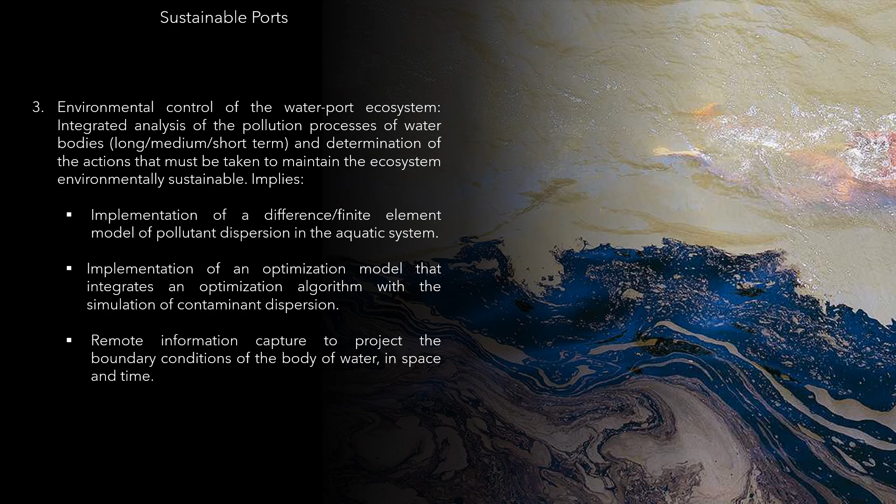Third, environmental control of the water port ecosystem: integrated analysis of the pollution processes of water bodies and determination of the actions that must be taken to maintain the ecosystem environmentally sustainable. It implies implementation of a finite elements pollutant dispersion model in the aquatic system, implementation of an optimization model that integrates an optimization algorithm with the simulation of contaminant dispersion, remote information capture to project the boundary conditions of the body of water in space and time, and weather planning of the trip on the boat.

Three aspects must be taken into account in fuel consumption, and therefore in the emissions generated: tidal height, wave height, marine currents, and motor speed, which depends on the type of motor. Additionally, the characteristics of the boat must be considered, including the dead weight and the additional load. The wind speed and the water speed are determinant of the ship's speed and therefore fuel consumption. In practice, it is one more variable to control, which is directly affected by hydroclimatic conditions in the sea.

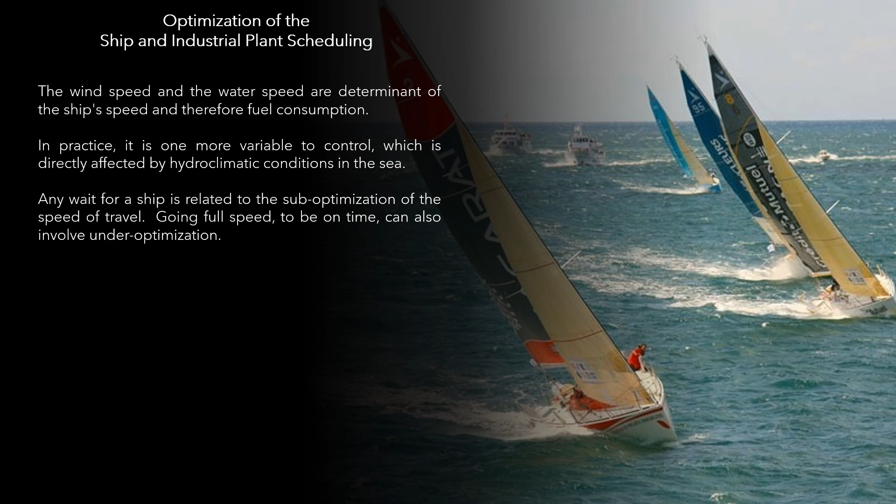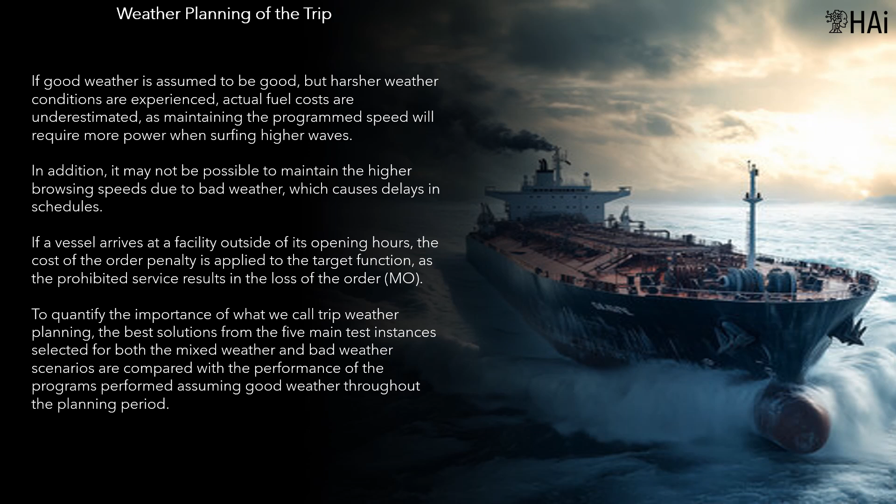Any wait for a ship is related to the sub-optimization of the speed of travel. Going full speed to be on time can also involve under-optimization. To quantify the importance of what we call trip weather planning, the best solutions from the selected test instances for both mixed weather and bad weather scenarios are compared with the performance of the programs performed assuming good weather throughout the planning period. The article: A Time-Dependent Vessel Routing Problem with Speed Optimization.

Introduce the mathematical model: Time-Dependent Vessel Routing Problem with Speed Optimization, TDVRP-SO, used in Norway for route and speed planning of ships visiting North Sea platforms.

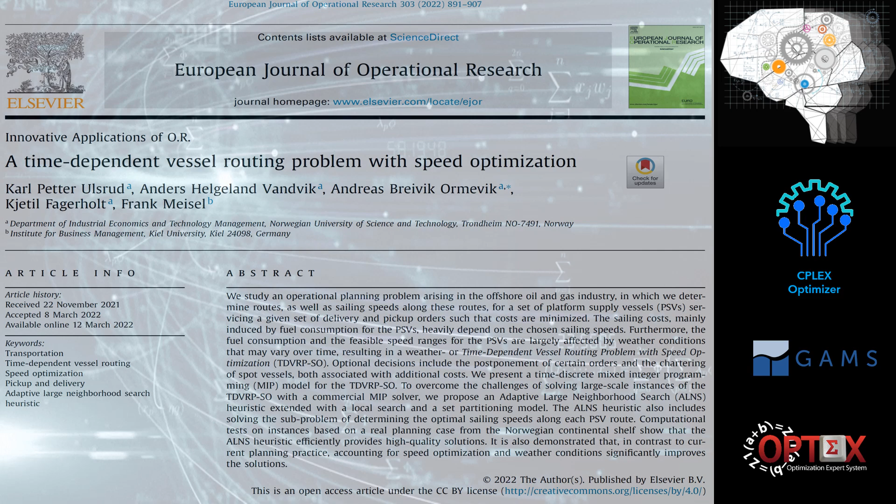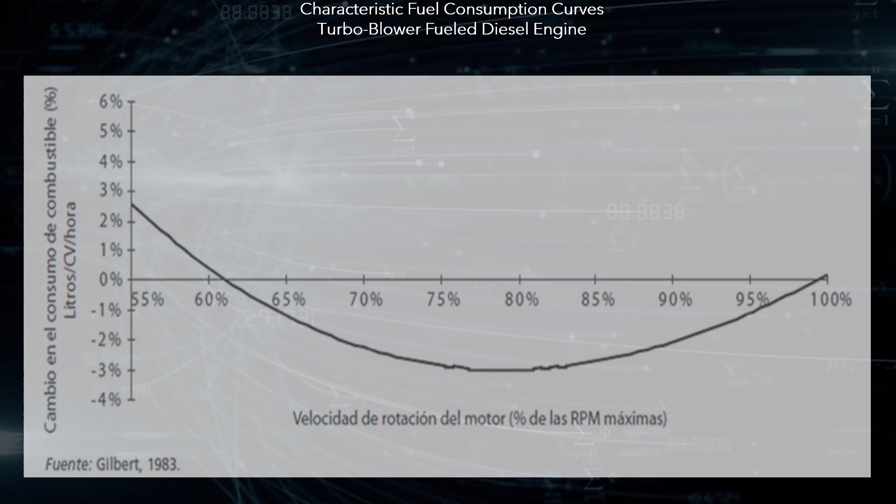It should be borne in mind that, from the point of view of fuel consumption, the efficiency of an engine is not given at the maximum of its power. The minimum unit cost per RPM is close to its maximum capacity, in the graph 80%. From that point on, as the ship's speed decreases, the amount of fuel consumed per unit of displacement increases. If RPMs increase above optimal capacity, the unit cost increases exponentially. On the other hand, these curves change depending on the weight of the boat and specific sea conditions. This behavior is independent of the size of the ship.

The graph presents the fuel consumption curves as a function of the ship's speed. There are 5 curves, for different revolutions per minute, which are related to different blade pitches. The exponential nonlinearity is evident.

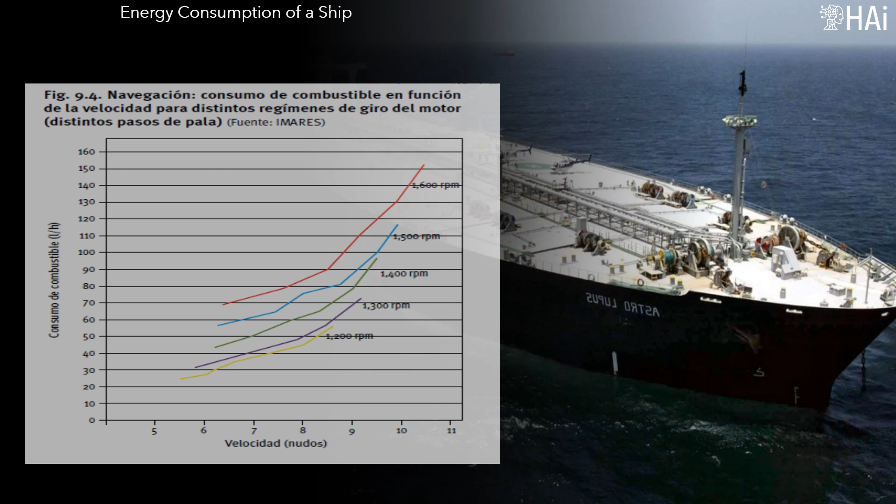The problem of supplying vessels to a rig is faced with operational planning arising in the offshore oil and gas industry, in which the routes and sailing speeds along those routes are determined for a set of platform supply vessels, PSVs, serving a set of delivery and/or pickup orders, so that costs are minimized. Navigation costs, mainly induced by the fuel consumption of PSVs, depend largely on the chosen sailing speeds. In addition, the fuel consumption and feasible speed ranges for PSVs are greatly affected by weather conditions that can vary over time, resulting in a weather-dependent vessel routing issue with route-dependent speed optimization.

This problem is called the Speed-Optimized Time-Dependent Ship Routing Problem, TDVRP-SO. The decisions include the deferral of certain orders and the chartering of spot vessels, both associated with additional costs, corresponding to a mixed integer programming model, MIP, with the heuristic adaptive large neighborhood search, ALNS.

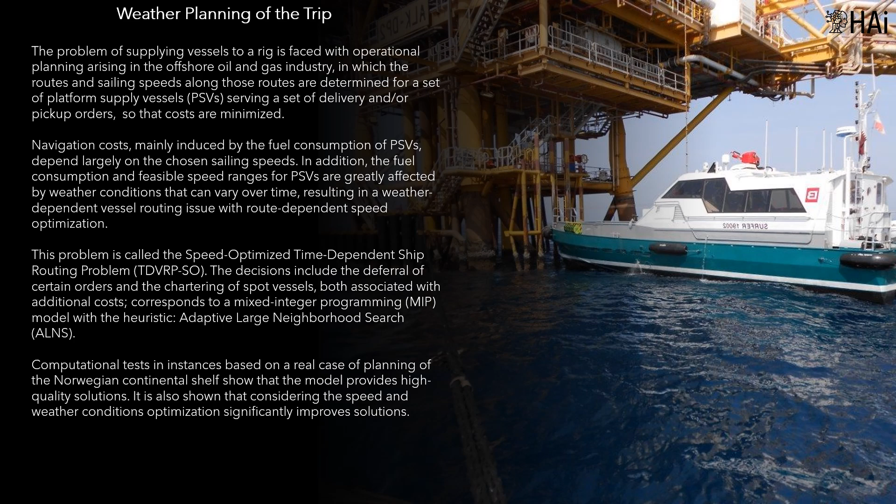Computational tests on instances based on a real case of planning on the Norwegian continental shelf show that the model provides high-quality solutions. It is also shown that considering speed and weather conditions optimization significantly improves solutions.

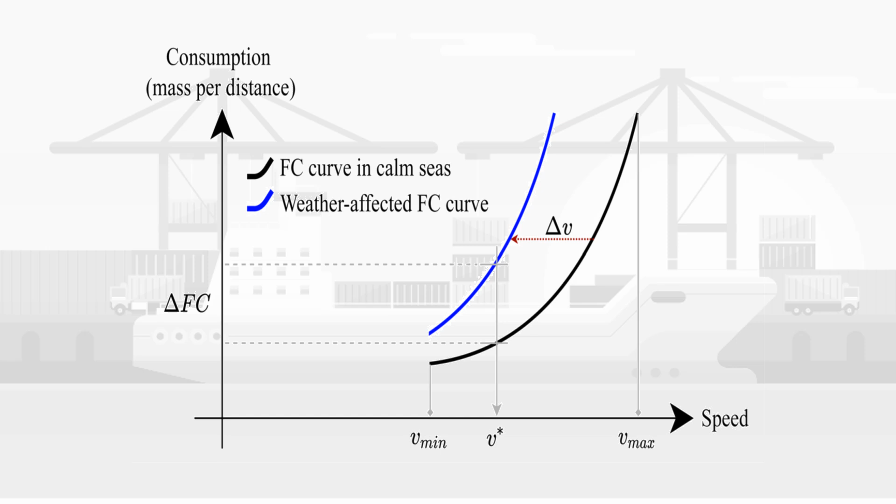The image shows fuel consumption, FC, as a function of speed. In this case, a fixed speed change delta V induced by weather conditions is assumed for all sailing speeds, shifting the fuel consumption curve horizontally so that maintaining the desired speed V* becomes a considerably higher fuel consumption, with exponential growth. V min denotes the starting point of the speed range in which fuel consumption is a convex function of cruising speed.

The TDVRP-SO determines the optimal cost-based trips, or routes, for the PSVs being used, including a full schedule indicating navigation speeds and downtime or service required on all navigation legs.

It is also decided which orders to deliver and collect, and which to postpone, along with the decision of whether to charter spot vessels on the spot market, in order to fulfill all mandatory delivery orders.

The figure summarizes the solution process for TDVRP-OS, listing the necessary input parameters and the decisions obtained, and how they can be categorized based on their characteristics.

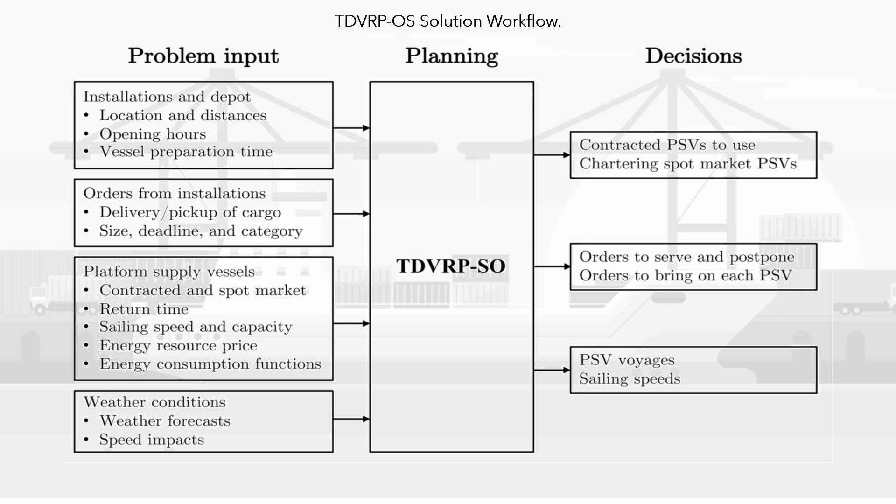Initially, an academic case is presented. The wave height forecast is illustrated in the figure, where horizontal lines indicate the maximum permissible height, 4.5 meters, beyond which orders cannot be handled in offshore facilities, for safety reasons.

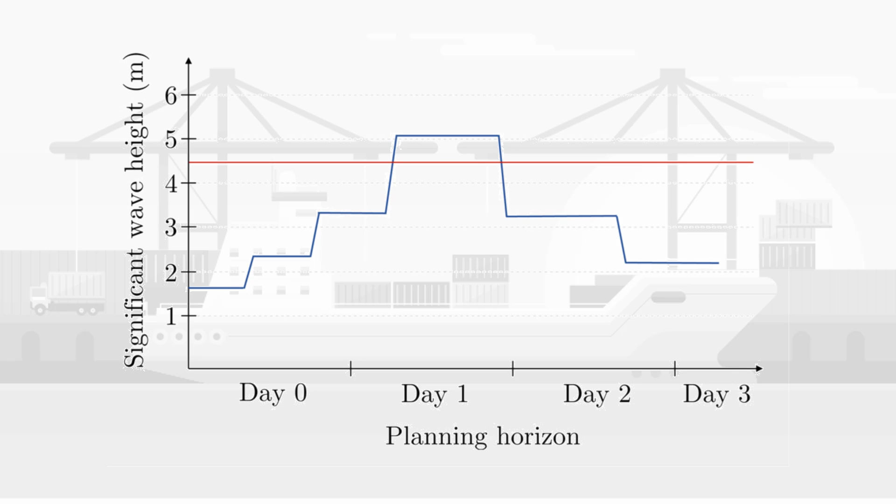The example problem considers orders placed by 5 installations. Each order is a mandatory delivery, MD, optional delivery, OD, or optional pickup, OP. Order sizes are given in containers.

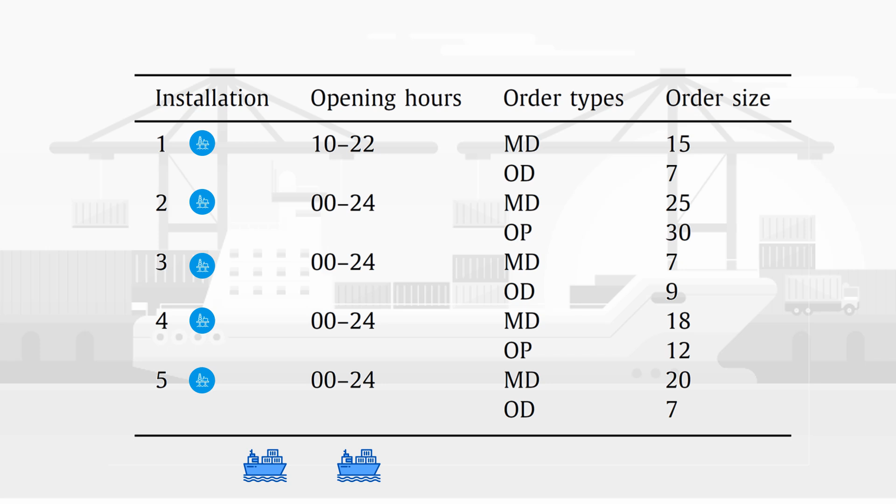2 contracted vessels, PSV-1 and PSV-2, are available, with a cargo capacity of 110 and 85 containers, respectively. For both boats, the allowable speed range is 10 knots to 14 knots, the maximum sailing speed in good weather.

The image presents a possible solution to the problem, in which all orders, both mandatory and optional, are fulfilled. The figure indicates the corresponding voyages of the 2 vessels and shows the sailing speed chosen for each leg.

PSV-1 cruises at full speed to reach Facility 1 before closing at 10 p.m. The cruising speed remains relatively high until delivery has been made to the last facility, number 4. This happens to complete all cargo handling activities before weather conditions worsen on day 1.

The day's services are prohibited. On the last stretch of navigation leading back to the supply depot, the speed is reduced to a profitable minimum, as there is no risk of violating the permitted duration of the 3-day voyage.

The northernmost journey is made by PSV-1. The green positive numbers represent the pickup quantities, and the negative, red, numbers represent the cargo deliveries.

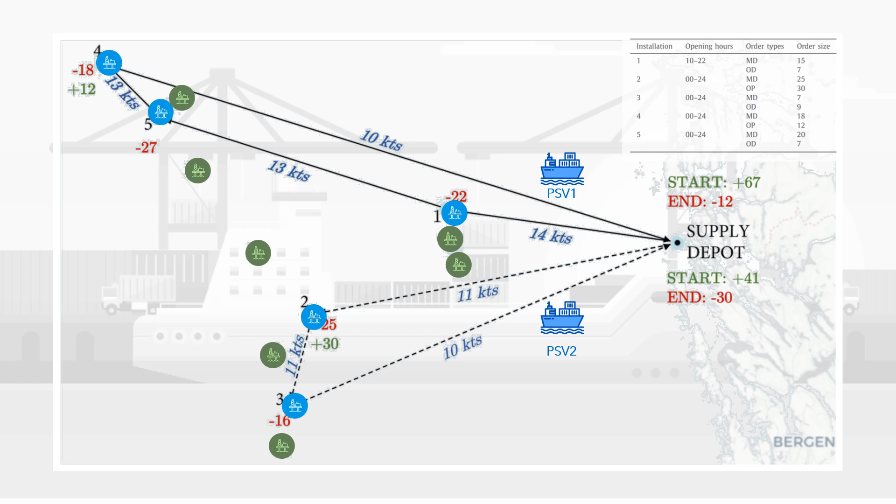Real-world experiments consider Norway's oil production in the North Sea. For realistic instance generation, the offshore logistics network related to the Mongstad supply base, located on the west coast of Norway, was considered. Mongstad is one of the largest ports related to oil and gas-related activities in Europe, in terms of freight traffic, and 27 offshore facilities are served from this base.

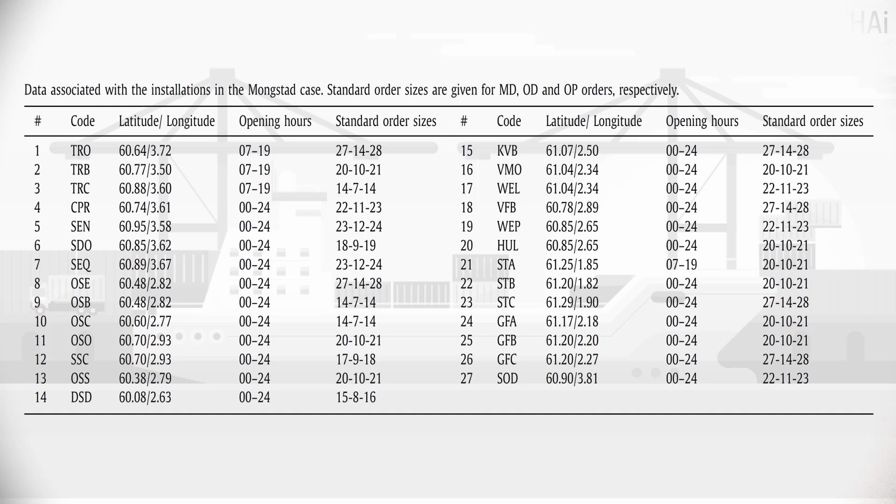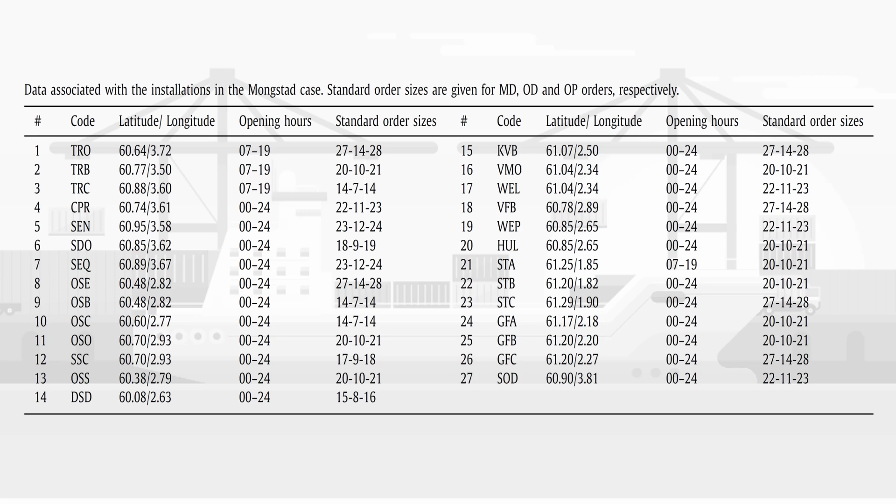For each facility, an identification code, geographic location in terms of latitude and longitude, opening hours, and a standard order size are used to generate multiple test instances. Data associated with the 27 facilities in the case of Mongstad. Longitude, latitude, hours of operation, and standard order sizes are provided for MD, OD, and OP orders, respectively.

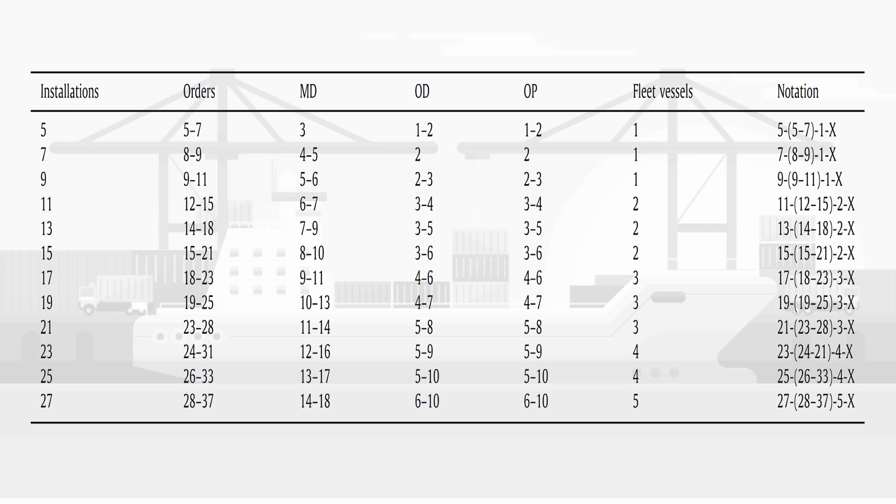Test instances used for computational study are grouped by the number of installations in each instance. There are 5 test instances within each group. The number of orders may vary, but the number of vessels in the fleet remains the same. Vessel chartering on the spot market is possible for all cases and in all groups.

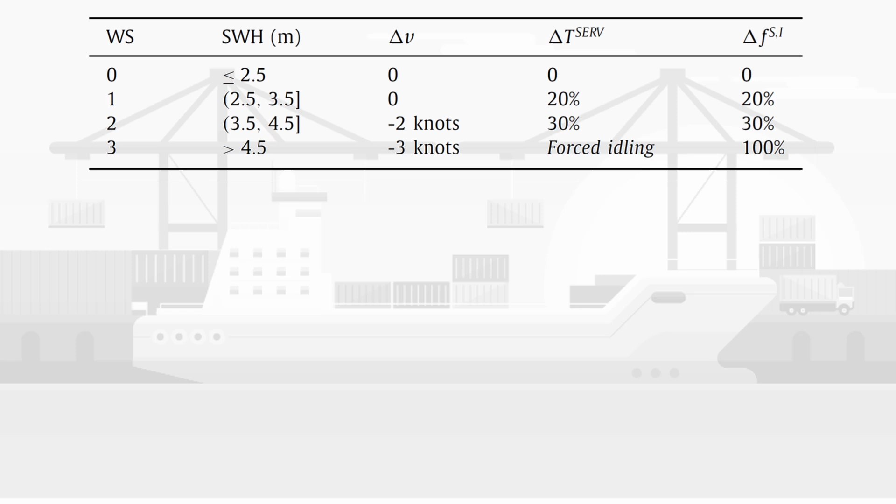4 meteorological states, WS, are considered based on significant wave heights, SWH, and the impact on PSVs in terms of forced speed reduction, delta V, as well as relative increases in service times, delta T serve, and fuel consumption, delta FS, I, for both service and idle time.

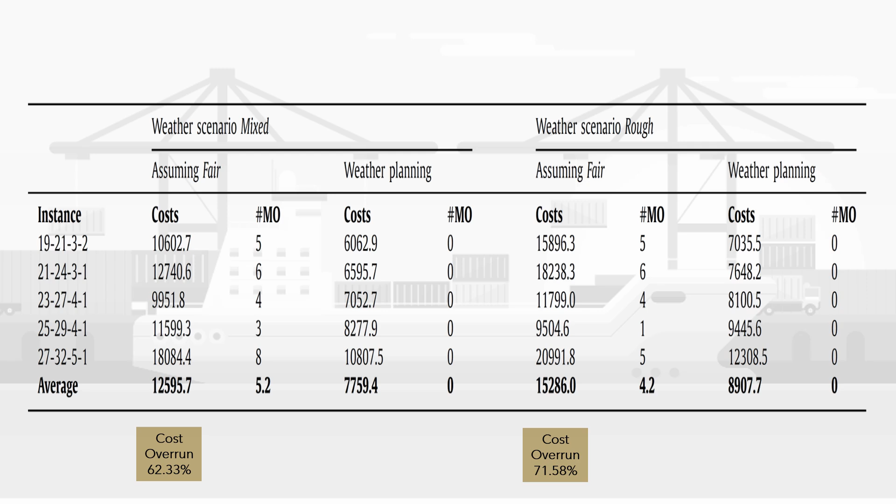The extra cost of planning based on a mental model, assuming it is fair, is significant, 62.33 and 71.58%. This is an indicator of the economic value of scientific planning.

Energy savings in train control optimization. The need for a clean environment is based on a rational consumption of energy. This covers all industries, and in general all human activities. Optimal train travel speed planning involves mathematical modeling to minimize energy consumption when the train has a predefined maximum arrival time.

First, it must be considered that all industrial processes are variable speed, and that energy consumption, depending on the speed of the process, is nonlinear, it is exponential. This implies that, in the absence of economies of scale, the regulation of the speed of industrial processes is fundamental in the process of controlling energy consumption. Production facilities do not have a defined capacity, it is set according to the speed of the process, and the time that this speed lasts. That is a decision variable of industrial operations.

The train control optimization involves several steps. These are: vehicle's energy demand, vehicle's energy balance, substation's energy balance, braking energy use, supply system measures, and further approaches. Several of them involve mathematical optimization processes.

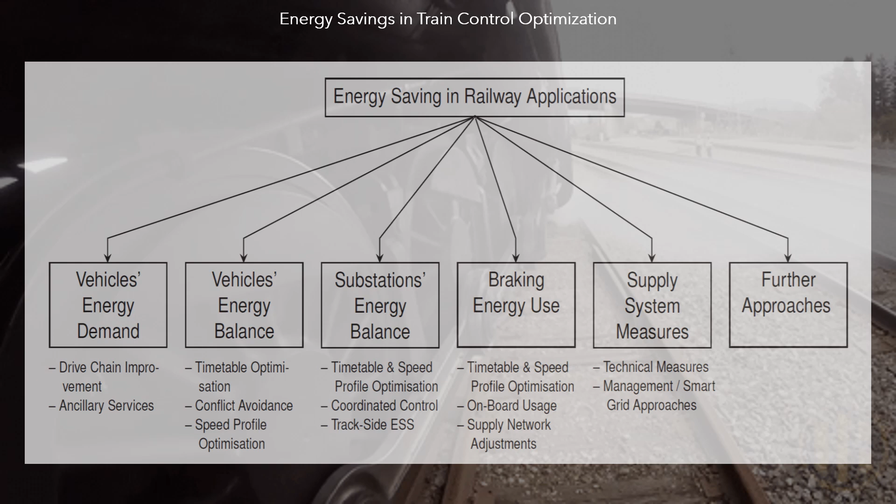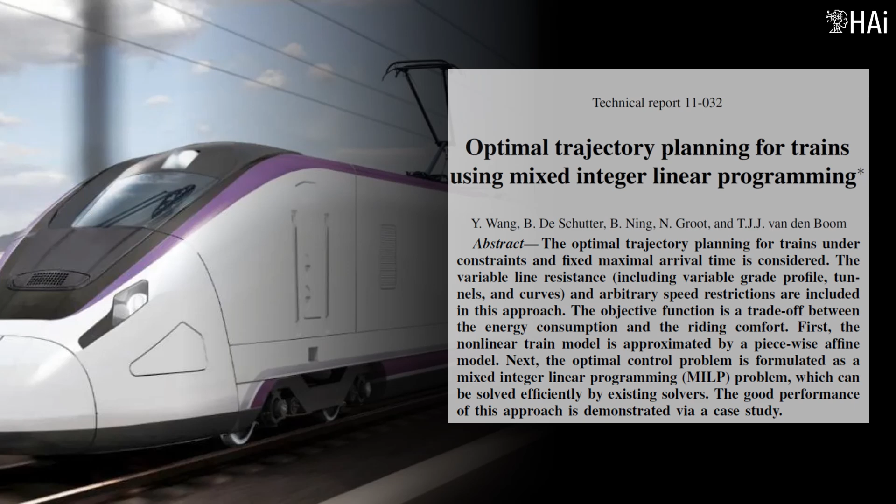The paper 'Optimal Trajectory Planning for Trains Using Mixed Integer Linear Programming' presents a mathematical model that includes, in detail, the resistance of the route, such as slope, tunnels, and curves, and arbitrary speed restrictions. The objective function is a weighting between energy consumption and driving comfort, but it could be minimizing the cost of energy. The nonlinear function of energy consumption versus velocity is represented by a piecewise linear function. The optimal control problem is formulated as a mixed integer linear programming (MILP) problem, which can be efficiently solved by existing solvers. The case study considered 2 cases.

For the first case, the total running time equals 5.25 minutes, indicated by T1, black solid line, while for the second case it is 10 minutes, indicated by T2, red dashed line. The speed of the train is presented in Figure 1. The optimal reference trajectories and the traction and braking forces applied are shown in Figure 2. The energy consumption with running time T2 is lower than that with running time T1, but at the cost of a longer travel time. Figures 3 and 4.

It is worth noting that the computation cost is very low for this MILP approach, less than 10 minutes in 2011. Today the algorithm must be at least 1,000 times faster.

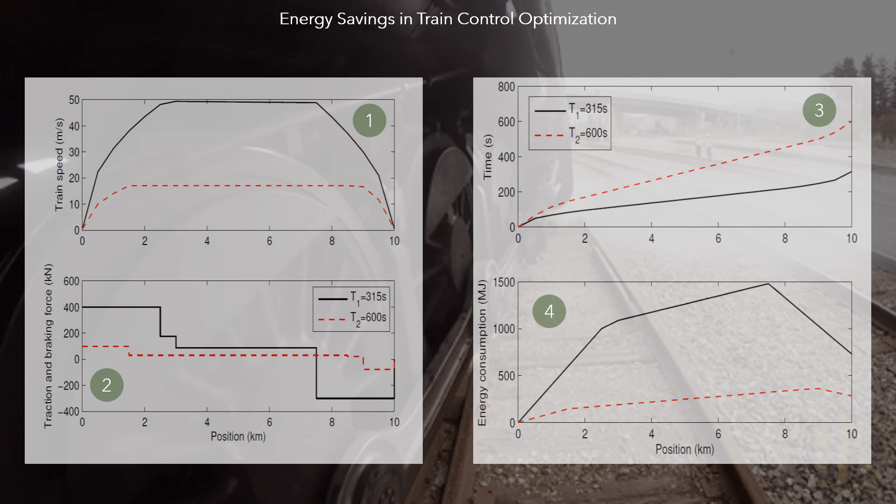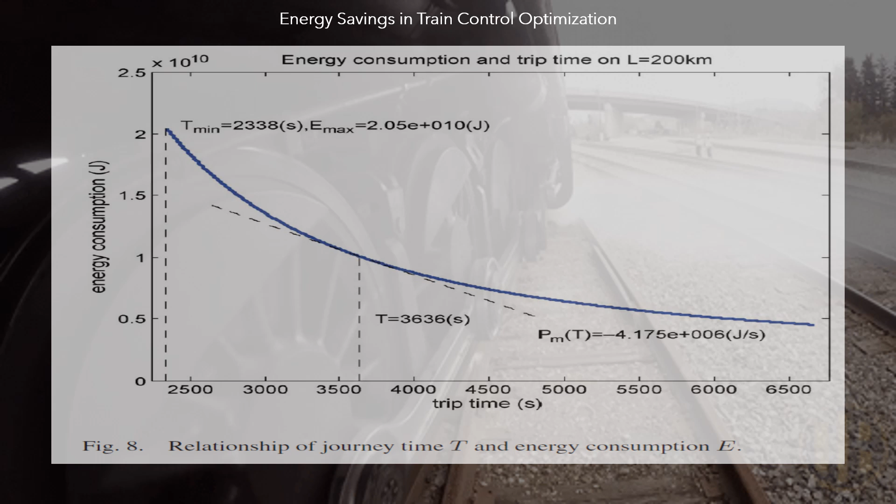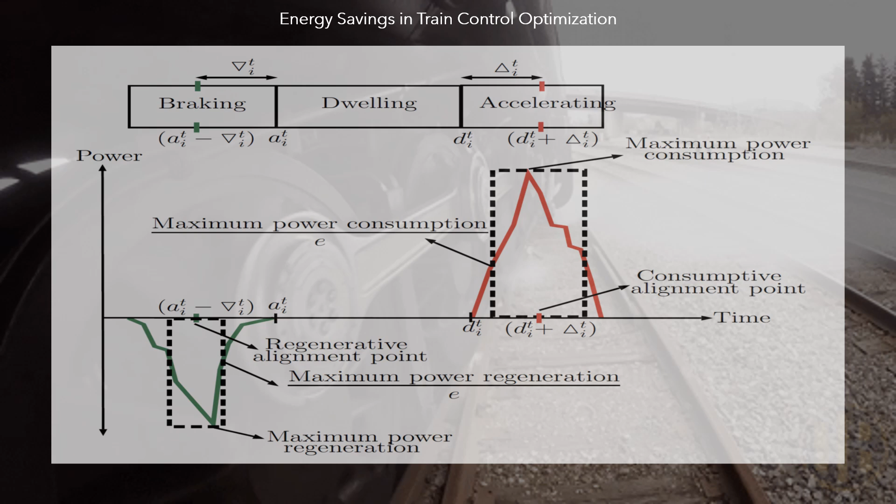The train journey can be modeled as an interleaved sequence of three states. Braking, when the train slows down, eliminating energy consumption or recovering previously consumed energy, which can be used later, green line. Dwelling, when the train maintains a constant speed, minimizing energy consumption. And accelerating, when speed is increased, and energy is consumed according to the situation, red line.

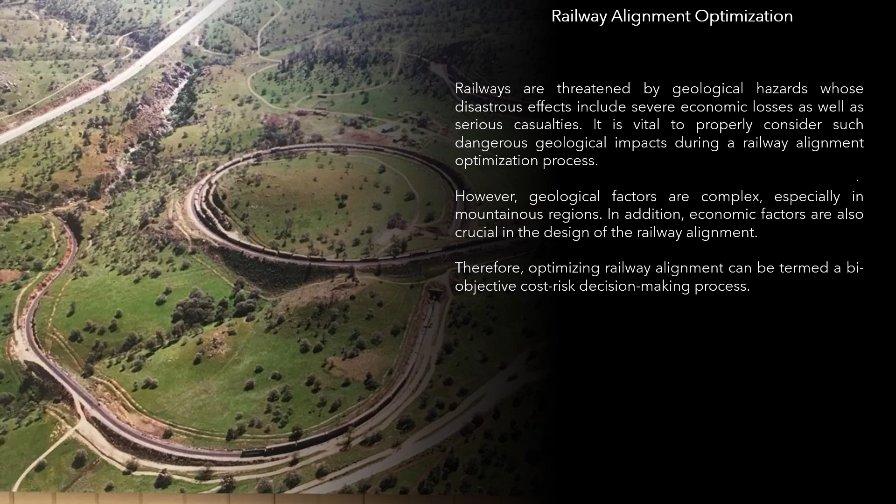Railway alignment optimization. Railways are threatened by geological hazards whose disastrous effects include severe economic losses as well as serious casualties. It is vital to properly consider such dangerous geological impacts during a railway alignment optimization process. However, geological factors are complex, especially in mountainous regions. In addition, economic factors are also crucial in the design of the railway alignment. Therefore, optimizing railway alignment can be termed a bi-objective cost-risk decision-making process.

Truck speed modeling is very important in long-range travel. In state-of-the-art cargo transport vehicles, the engines are electronic, digitally controlled, with telemetry capacity from the nearby environment. This autonomous capability may be called optimal short-range control.

However, there is another level of vehicle operations planning that is long-range and related to the total journey. The problem of optimizing energy consumption—gasoline, diesel, natural gas, propane, or electricity—is complicated because the energy function is nonlinear and depends on factors that result from the decision-making process, such as the load and the position of the truck at any moment.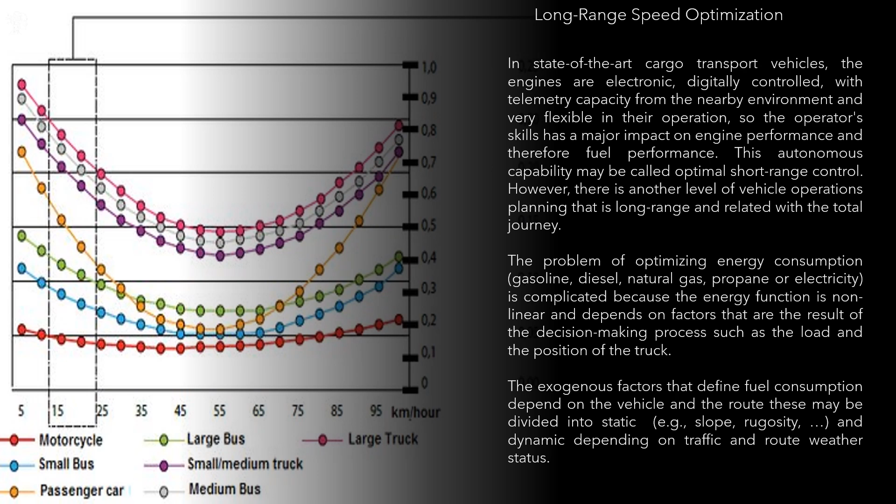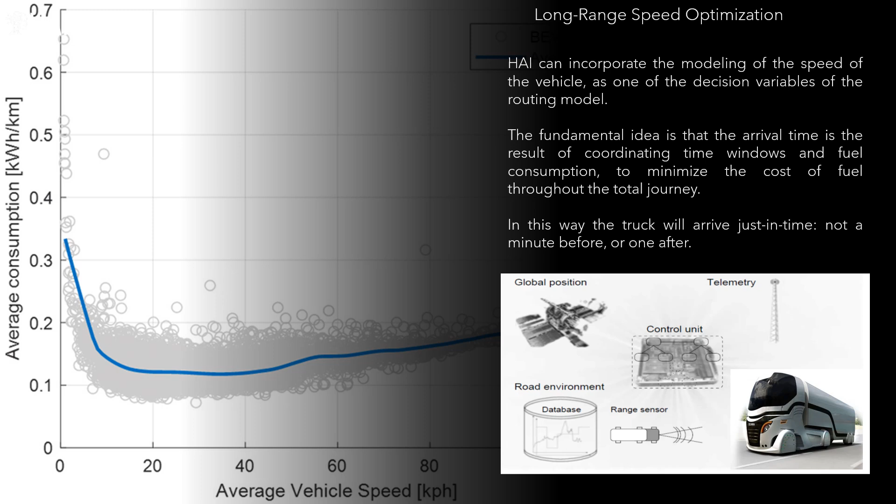Additionally, there exist exogenous factors that define fuel consumption, depending on the vehicle and the route. These may be divided into static factors, for example slope and rugosity, and dynamic factors that depend on traffic and weather status. We can incorporate the modeling of the speed of the vehicle as one of the decision variables of the routing model. The fundamental idea is that the arrival time is the result of coordinating time windows and fuel consumption, so as to minimize the cost of fuel throughout the total journey. In this way, the truck will arrive just in time, not a minute before or one after.

Emissions estimation in multimodal transportation. Ports play a key role in fostering the growth of trade and national and international economies. As ports continue to expand in size and capacity, the impact of their operations on air quality and climate change becomes increasingly significant. While nearby regions may experience economic benefits, there are significant concerns regarding the emission of air pollutants, which have adverse effects on both human health and climate change. Predictive modeling of port emissions is a valuable tool for identifying areas of concern, assessing the effectiveness of emission reduction strategies, and promoting the sustainable development of ports. The main objective is to estimate SO2 emissions from ships during various port activities, including hoteling, maneuvers and cruises. The objective is to obtain information about emission patterns and explore strategies to mitigate their impact. The article, 'Towards Cleaner Ports: Predictive Modeling of Sulfur Dioxide Shipping Emissions in Maritime Facilities Using Machine Learning,' contains the case presented below.

Emissions estimation in multimodal transportation. Ports play a key role in fostering the growth of trade and national and international economies. As ports continue to expand in size and capacity, the impact of their operations on air quality and climate change becomes increasingly significant. While nearby regions may experience economic benefits, there are significant concerns regarding the emission of air pollutants, which have adverse effects on both human health and climate change. Predictive modeling of port emissions is a valuable tool for identifying areas of concern, assessing the effectiveness of emission reduction strategies, and promoting the sustainable development of ports. The main objective is to estimate SO2 emissions from ships during various port activities, including hoteling, maneuvers and cruises. The objective is to obtain information about emission patterns and explore strategies to mitigate their impact. The article, Towards Cleaner Ports, Predictive Modeling of Sulfur Dioxide Shipping Emissions in Maritime Facilities Using Machine Learning. It contains the case presented below.

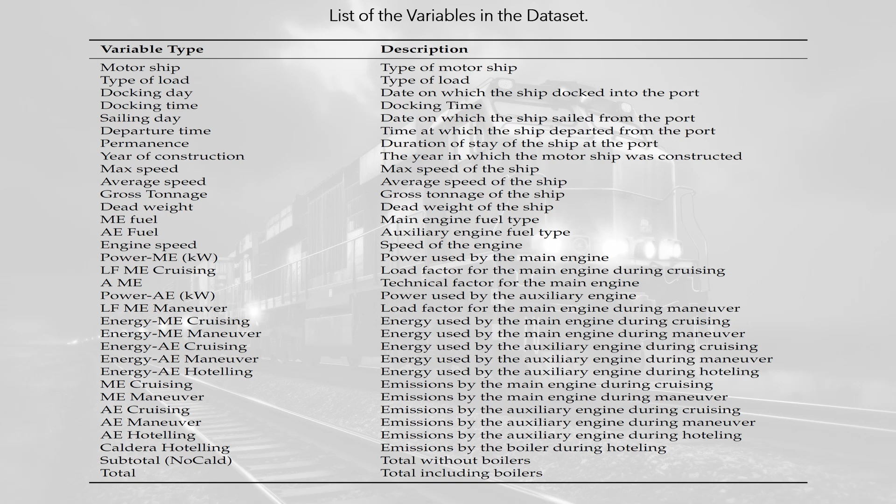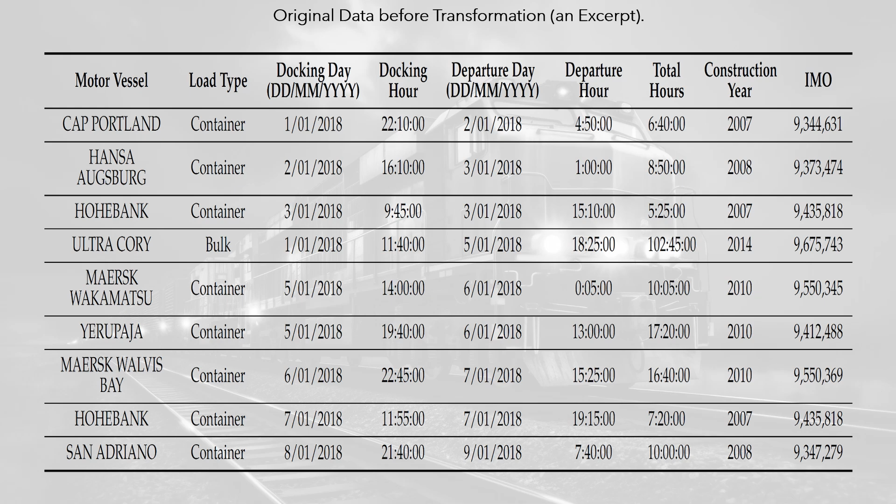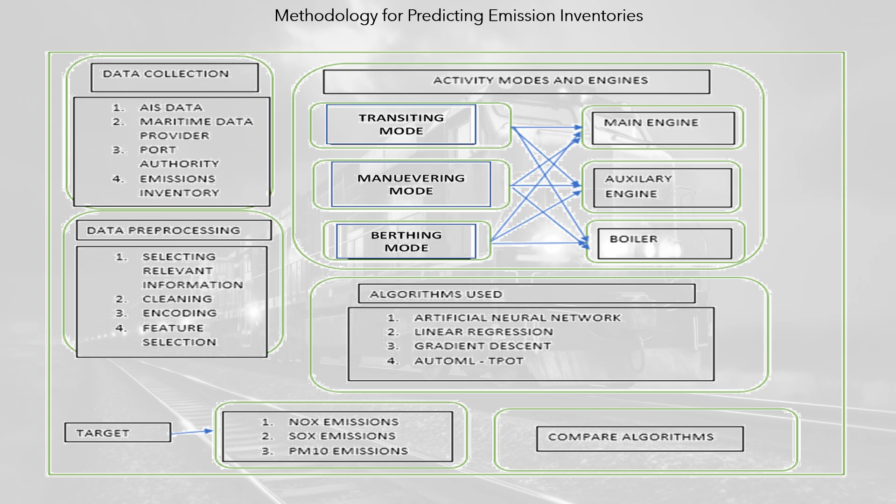Artificial neural networks, linear regression, gradient descent, and automated machine learning. Automated machine learning, or AutoML, is a term used to describe strategies that automate the process of identifying high-performing models for predictive modeling tasks with very low human intervention. One notable Python-based open-source library for AutoML is TPOT.

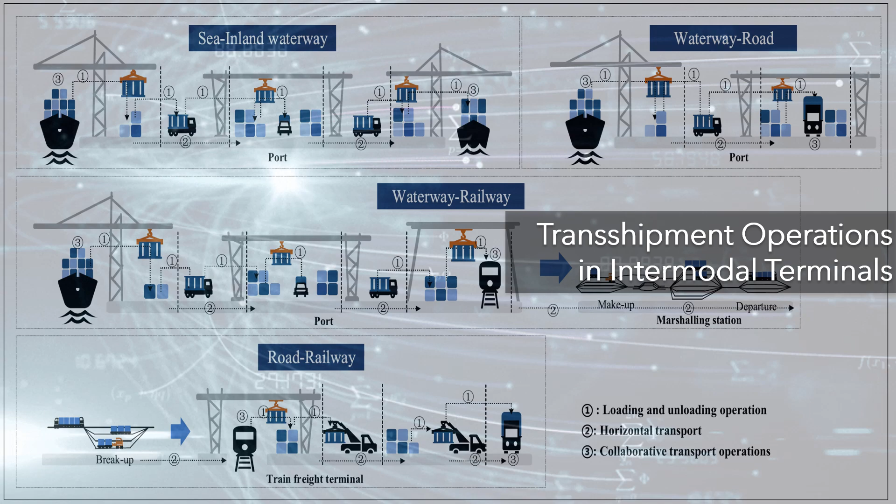Transshipment operations in intermodal terminals. The article, Modeling Carbon Emission Estimation for Hinterland-Based Container Intermodal Network, contains the case presented below.

To address growing environmental challenges, the analysis of high-carbon transport systems seeks to achieve carbon peak and carbon neutrality goals, calculating the carbon emissions estimate and identifying carbon reduction drivers for the hinterland-based intermodal container network.

The impact of transport vehicles on climate change is often analyzed from the well-to-wheel (WTW) perspective, consisting of two phases: well-to-tank (WTT) and tank-to-wheel (TTW).

WTW is a life cycle evaluation mode developed for transport fuels and energy carriers that cover resource extraction to vehicle operation, excluding the vehicle's life cycle.

In the TTW mode, electrical energy is estimated to be zero carbon emission. In the existing studies on intermodal emissions, there are few works that distinguish between the two emission modes.

Well-to-wheel (WTW) and tank-to-wheel (TTW). Taking the port of Shanghai and the Yangtze River Delta as a case, carbon emissions from the last 10 years are used for the WTW and TTW modes.

The critical factors that drive sensitivity analysis and the variation of carbon emissions in different scenarios with carbon reduction policies are identified. The results indicate that transport structure and fuel choice significantly affect the reduction of network emissions.

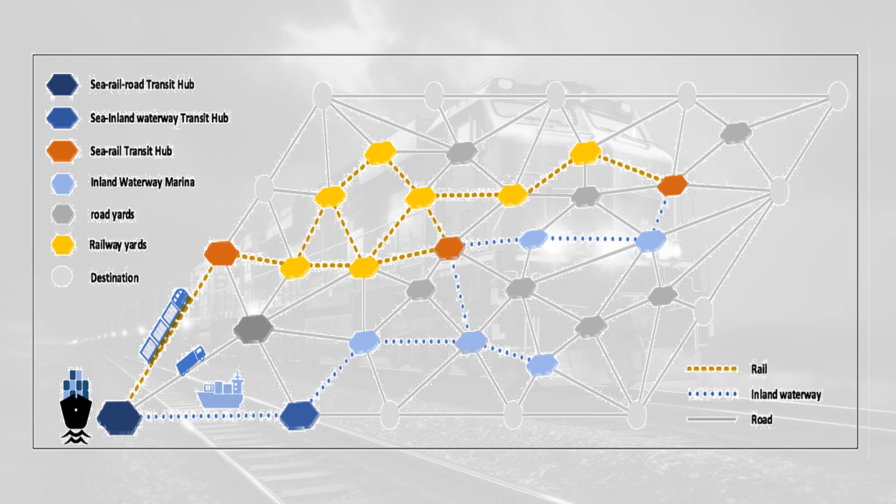The network estimation model of carbon emission evaluates the carbon emission for each specific period, and the hinterland transportation of containers includes roads, inland waterways and railways. The last mile distribution depends on road transport.

The carbon emissions estimation model of the intermodal network is developed in two stages, including transport and transfer. The freight flows model obtains the container freight flows from the port to nodes, then combined flows with the carbon emission estimation model to obtain the carbon emission of the network.

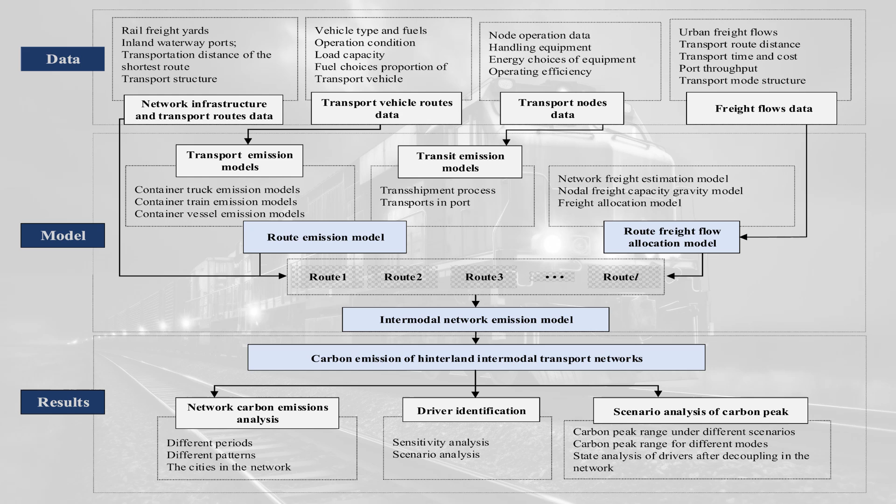The model can be used to estimate carbon emissions in a regional intermodal network by using each node in the region as a flow sending point and repeating the above calculation steps. The figure shows the flowchart of the math model and the container transport process in the intermodal transport network.

On the one hand, the container transshipment operations include loading and unloading operations and horizontal transport operations, which vary depending on the different terminals. Trucks can usually transfer in port directly, while transshipment of trains and ships depends on the infrastructure of the port to consider whether it is possible to transfer directly, or else they must be connected by trucks for short connections.

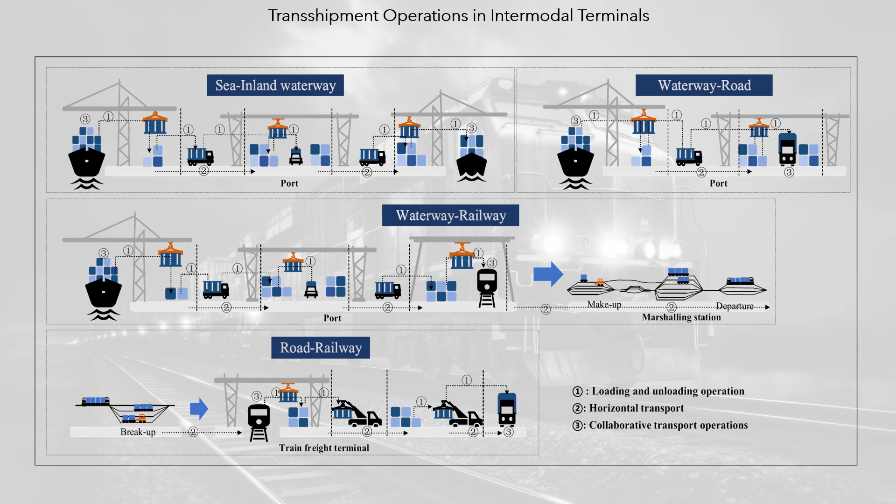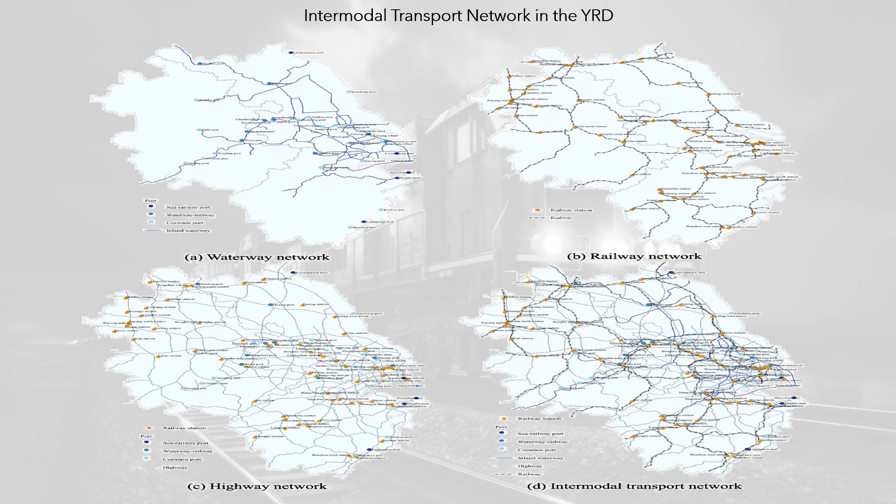The main uncertainties in this study are the container flow ratio and container weight of the freight flows forecast, vehicle activity efficiency, energy efficiency, transshipment efficiency, and port operation.

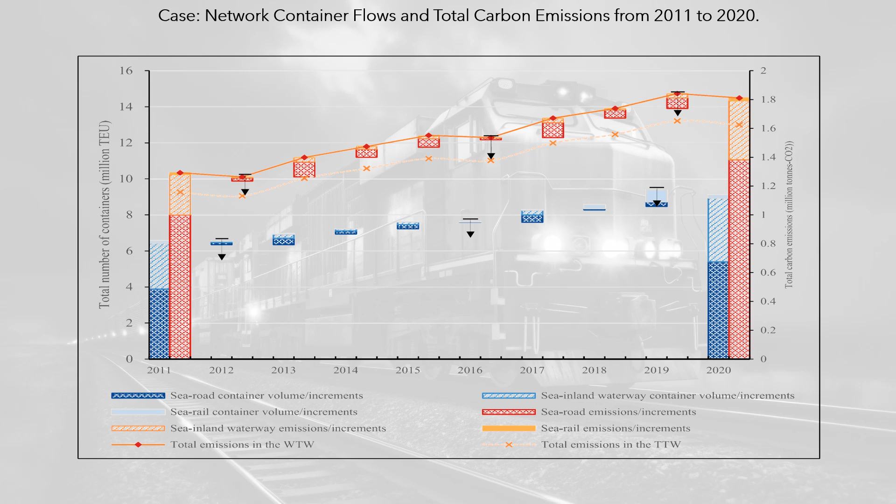To discuss the impact of uncertainty, we analyze the impact of different parameter changes on the overall carbon emissions, using container flows data in 2020 as the baseline value and identify the critical driver factors affecting the network carbon emissions.

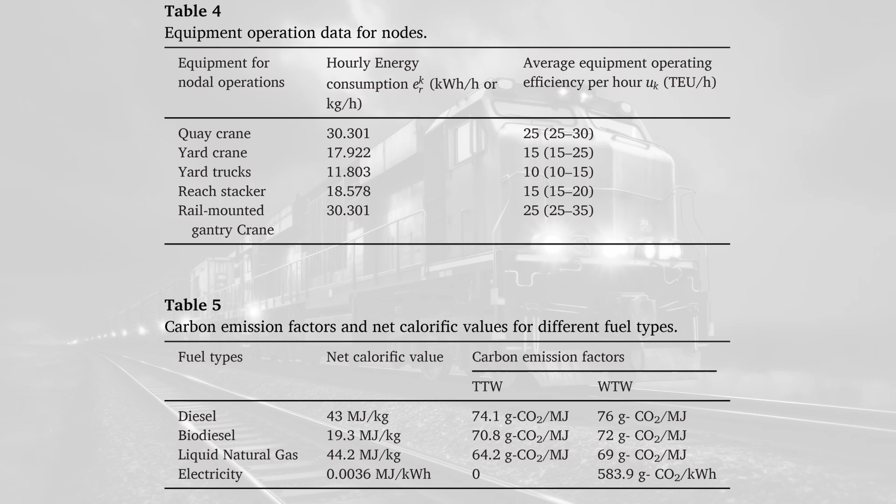The transfer of 10% of container flows from road transport to rail and water transport at the same time can bring 153,600 tons of carbon emission reduction, accounting for 8.4% of the total emissions in 2020.

Rail and water transport have a low share of container flows and low carbon intensity in the current network, which indicates that there is still considerable potential to adjust the existing transport structure for emissions reduction.

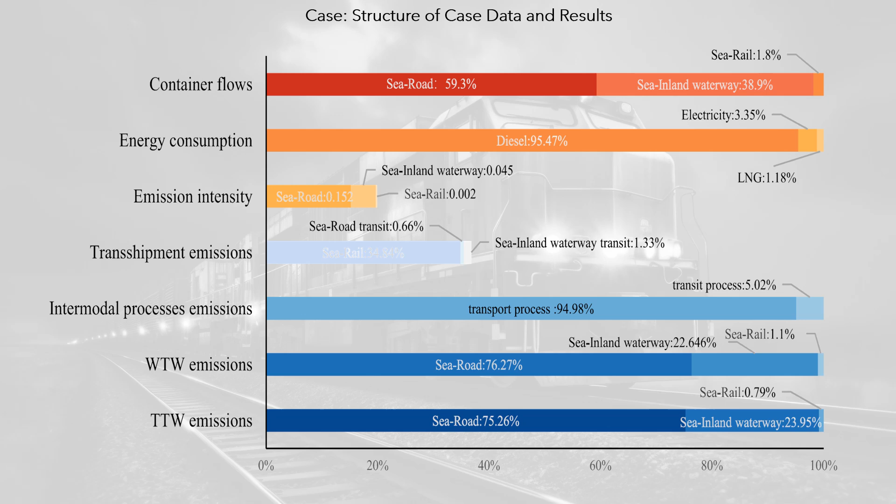The image shows the aggregate structure of the case data and the results, as well as the sensitivity analysis of the key parameters. The increase of transit efficiency is more sensitive in both estimation modes.

The sensitivity factor for the WTW mode in 2020 is 4.6%, with a 10% increase in efficiency resulting in a decrease in carbon emissions, accounting for 0.5% of total carbon emissions and 9.3% of transit emissions in 2020.

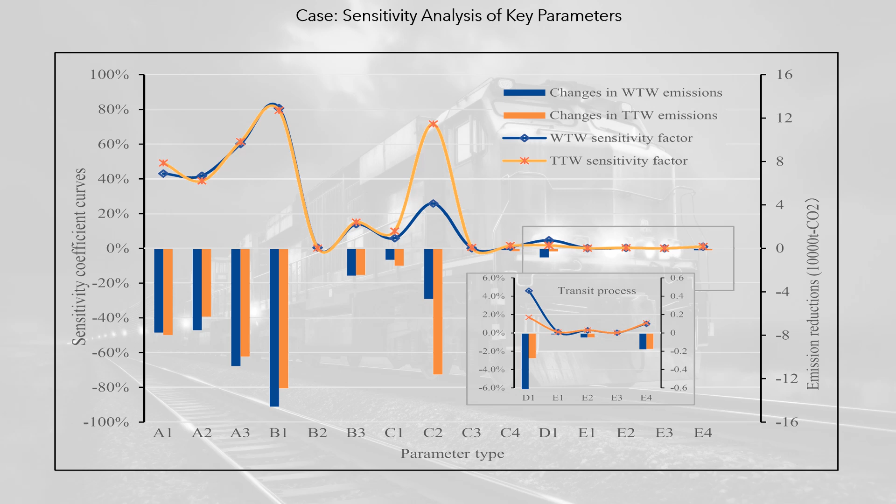It is followed by an improvement in the proportion of ship-truck direct transfers, with a sensitivity factor of 0.1%. Therefore, improving the overall efficiency of the transfer nodes and optimizing the truck-ship transfer operation have an important effect on the carbon emission reduction in the transfer process.

Based on the sensitivity analysis above, even though the best way is to improve truck energy efficiency to reduce carbon emissions, it's not easy for carriers to choose that because of the decreased engine efficiency and higher maintenance costs. In contrast, shifting road transport and container loading are better choices for the transportation department.

The critical driver factors according to the operability of the transport sector and intermodal companies on emissions reduction were ranked as follows: shifting of road transport to rail and water, increasing container weight, applying clean energy, improving truck energy efficiency, and improving transfer efficiency.

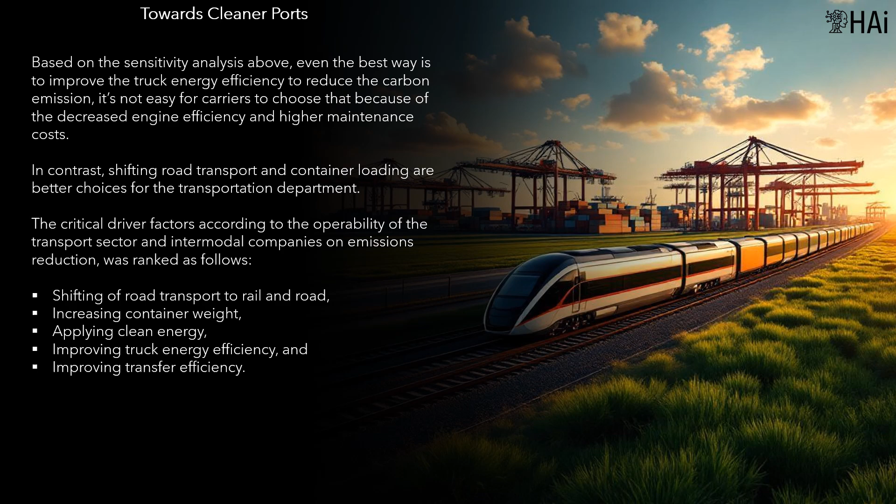To analyze the impact of emission reduction policies on CO2 emissions, the driver factors mentioned were grouped into 4 categories as follows: Transport restructuring, W1. Clean energy application, W2. Energy efficiency for transport vehicles, W3. And transfer technology upgrading, W4.

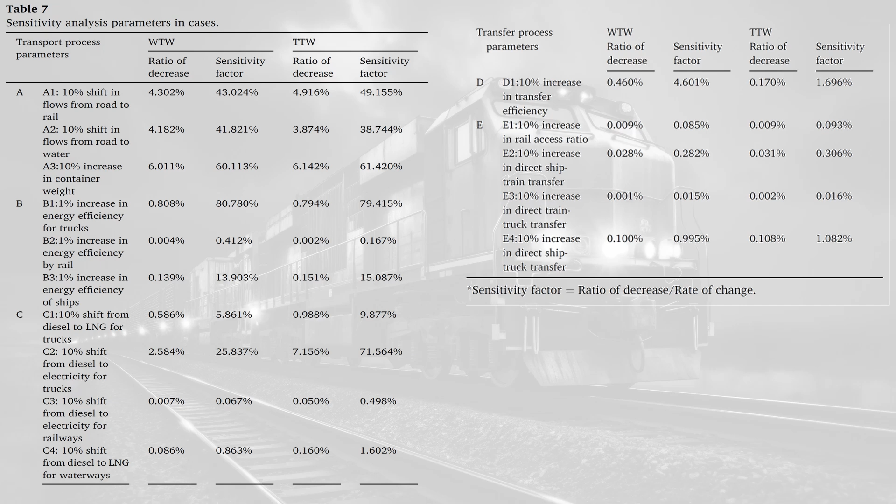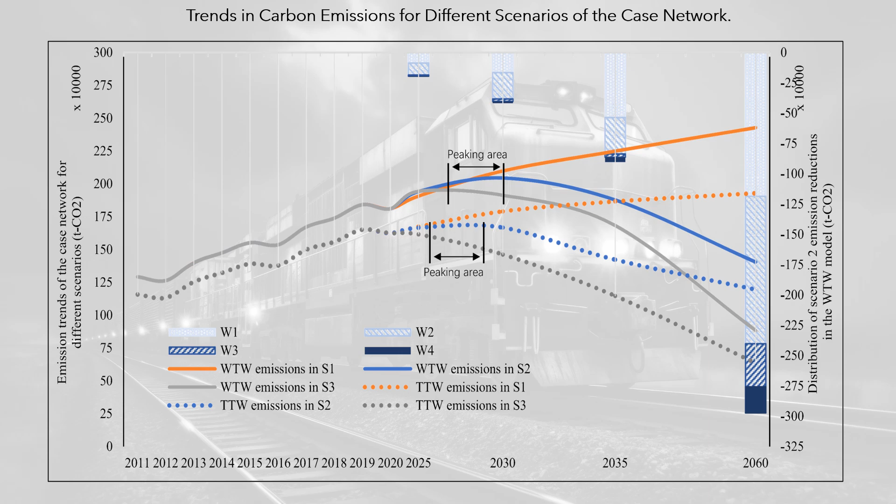Road transport and its carbon emissions continue to account for a significant part of the YRD network, accounting for 59.3% of container flow and 76.27% of total carbon emissions in the network, respectively. Diesel consumption, 92.07%, remains the main contributor to energy consumption.

Rail intermodal transport, which has the lowest carbon intensity in the network, does not feature prominently in the YRD network due to the poor transfer process and a small proportion of freight transport. The transition of transport structure and fuel options significantly affects the overall reduction in emissions, followed by the weight of containers.

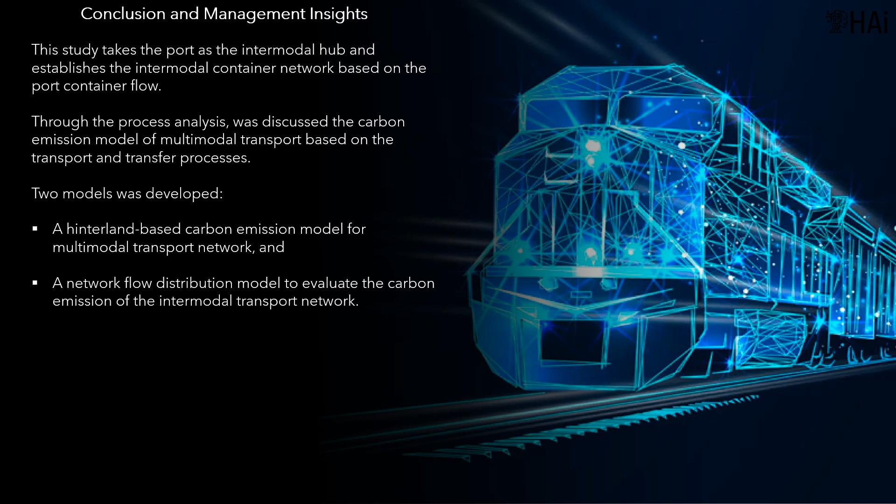This study takes the port as the intermodal hub and establishes the intermodal container network based on the port container flow. Through process analysis, we discussed the carbon emission model of multimodal transport based on the transport and transfer processes. Two models were developed: a hinterland-based carbon emission model for multimodal transport network, and a network flow distribution model to evaluate the carbon emission of the intermodal transport network.

Road transport and its carbon emissions continue to account for a significant part of the YRD network, accounting for 59.3% of container flow and 76.27% of total carbon emissions in the network, respectively. Diesel consumption, 92.07%, remains the main contributor to energy consumption.

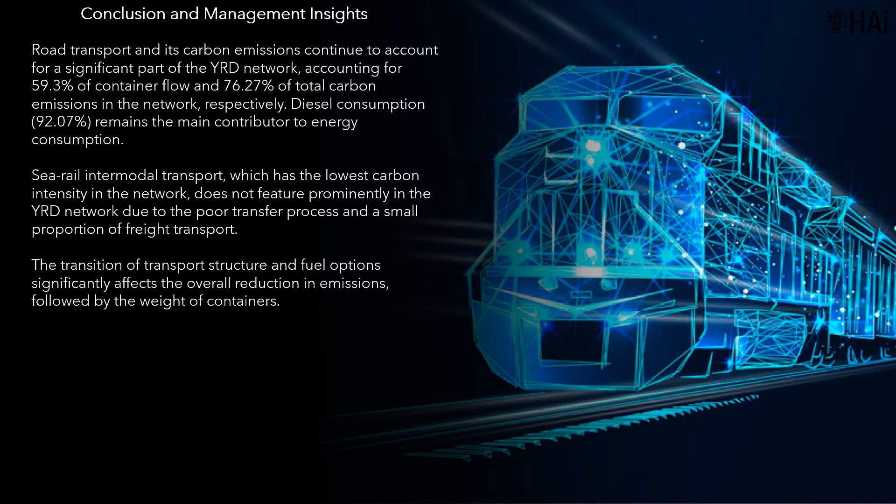Rail intermodal transport, which has the lowest carbon intensity in the network, does not feature prominently in the YRD network due to the poor transfer process and a small proportion of freight transport. The transition of transport structure and fuel options significantly affects the overall reduction in emissions, followed by the weight of containers.

The total carbon intensity is 0.1343 tons of CO2 per container, a decrease of 32.5% compared to 2020. The efficiency of the operation of the equipment, and the organization of transit between vehicles and vessels, have a significant impact on carbon emissions.

Alfred North Whitehead affirmed, "Algebra is the intellectual instrument which has been created for rendering clear the quantitative aspects of the world."